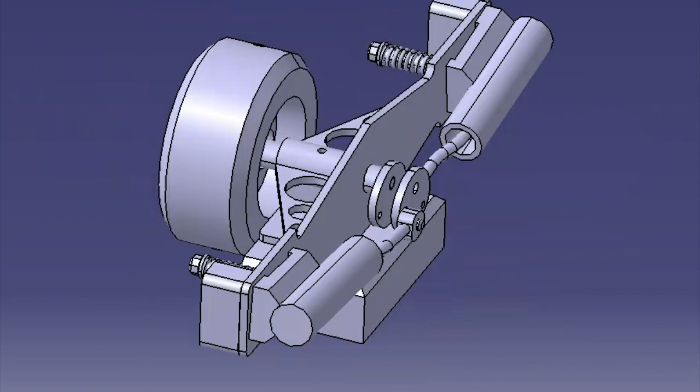In this video, we will be talking about the twin oscillating engine. Here you can see the twin oscillating engine in full assembly.

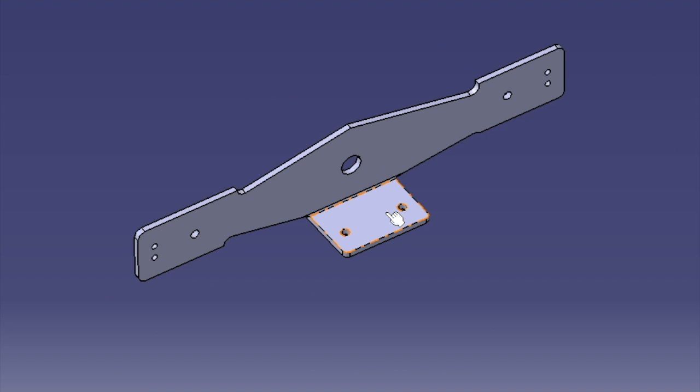Now we are going to move on to the base plate frame. The base plate frame is the mount for the piston assembly. It is made out of brass, and you can see that it's symmetrical about the y-axis.

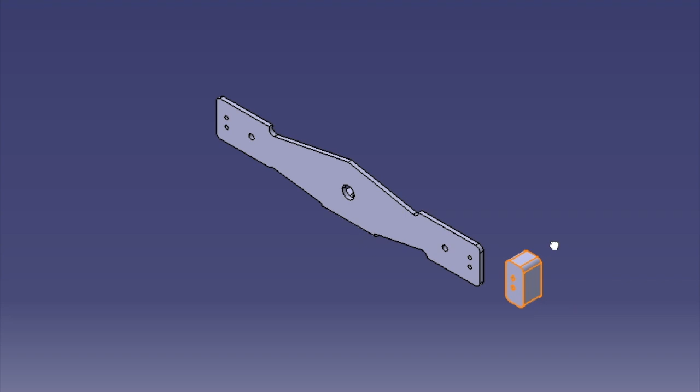Connected to the base plate are two top locks. The top locks act as stiffeners for the ends of the base plate. Here you can see there's one top lock on the right side, and one top lock on the left side. These are soldered to the base plate mount.

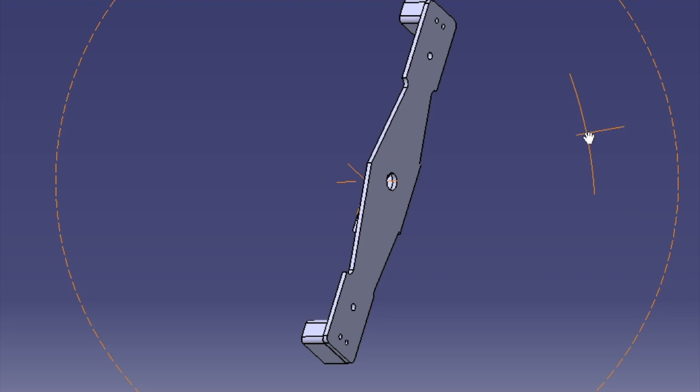Next, we are going to move on to the stiffener subassembly. Here you could see the crank bearing, which is the base of the stiffener assembly. The crank bearing is made out of brass. This is what holds the crankshaft. It is the guide of the crankshaft.

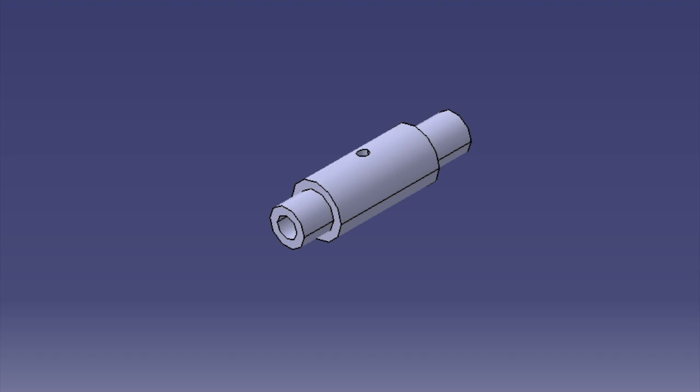Connected to the crank bearing are three stiffener plates. The two shown in the video are made out of brass, have a triangular form, and have holes in it to reduce the weight. These are used to mount the crank bearing to the plate frame assembly in order to hold the crankshaft in place. On the bottom is another stiffener plate used to level up the crank bearing and keep it secured.

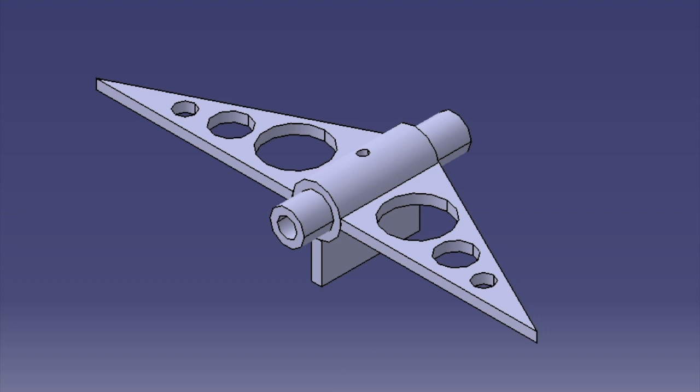Next, we will talk about the full assembly. Here is the base. The base is made out of wood and will hold up the rest of the assembly.

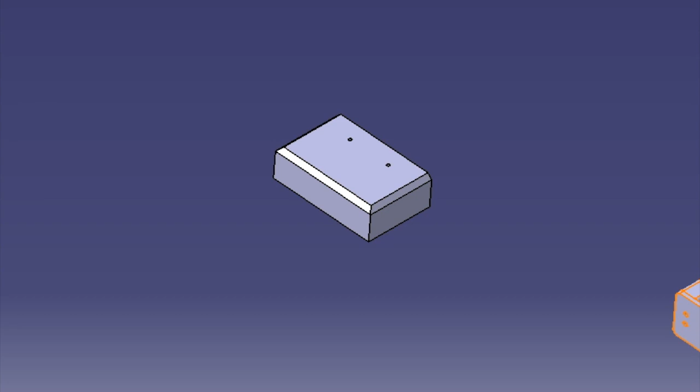Connected to the base is the base plate subassembly. It is connected by two wooden screws in these two holes.

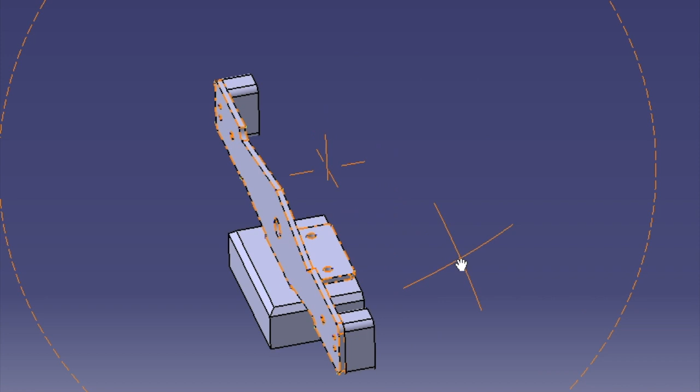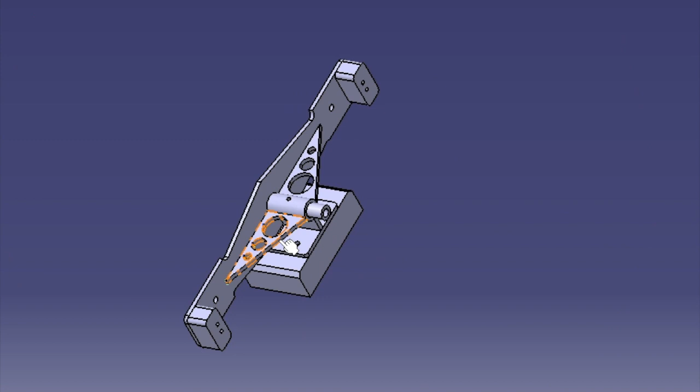Attached to the base plate is the stiffener assembly. It is soldered to the base plate at the three stiffeners.

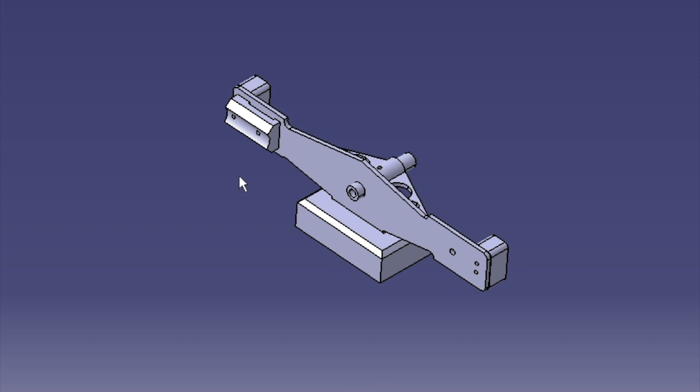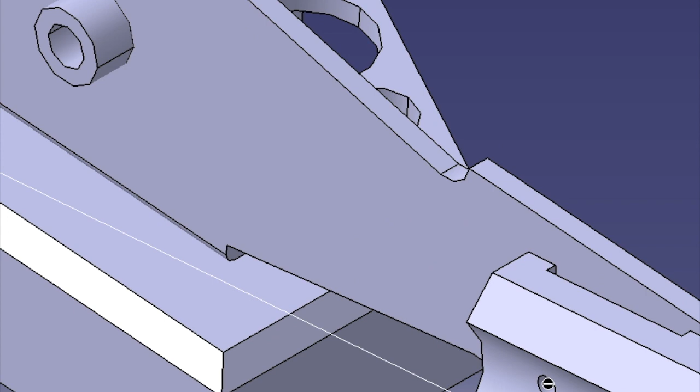Next, there are two cylinder bases. This is where the cylinder is going to sit. The cylinder bases are connected to the crank plate only at this hole. You see, it is free to rotate about that hole.

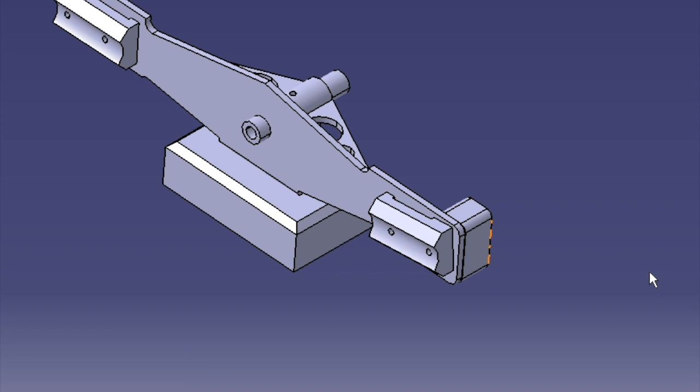The cylinder bases are made out of brass as well.

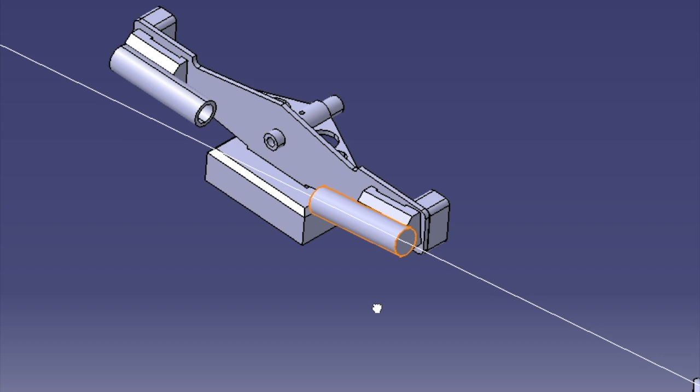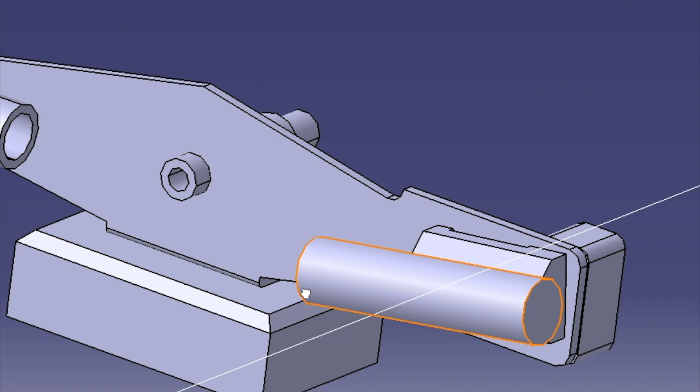Here you will see the cylinders that are connected to the bases. They are free to move about the same hole as the cylinder bases, as shown here. This will move with the bases around that hole. The cylinders are soldered to the cylinder bases.

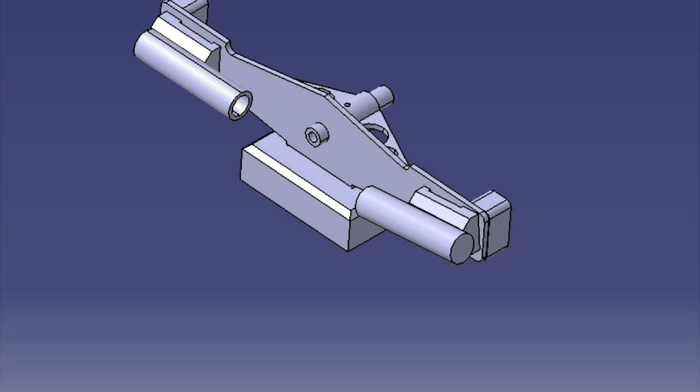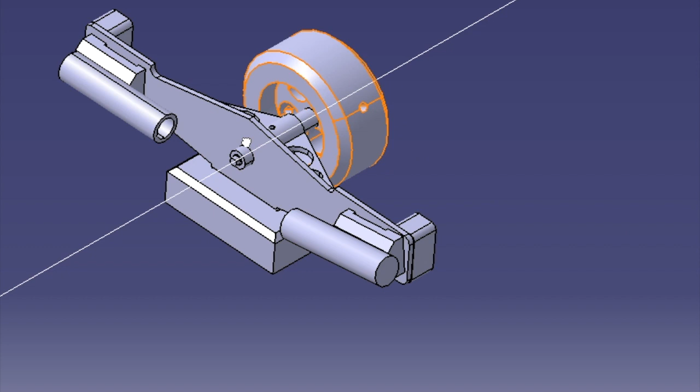Here is the crankshaft. This is what drives both the flywheel and the piston. It is free to rotate about the center axis. Here you will see the crank plate, which is connected to the crankshaft.

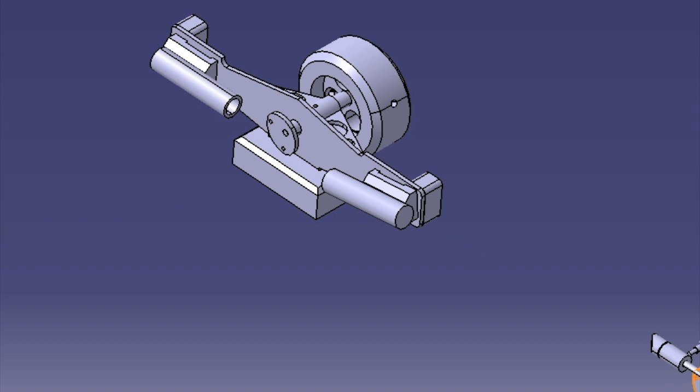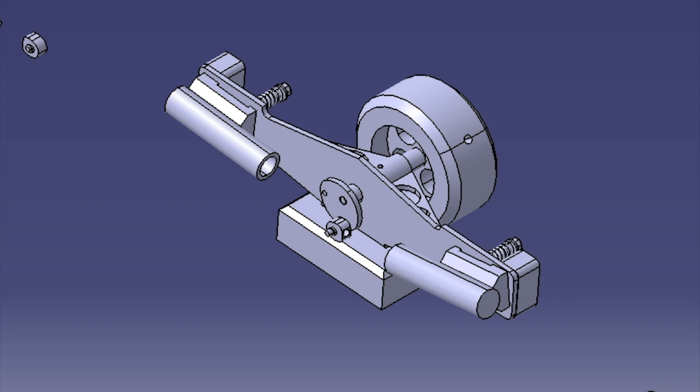Here is the big end of the piston stem and the pin that holds it in place. The pin is fitted into the big end and then fitted into the crank plate. On the other side of that pin is another crank plate, also fitted into the pin. Connected to the big end is the piston itself, the piston stem.

Connected to the piston stem is the piston that sits inside the cylinder. It is free to rotate in any way.

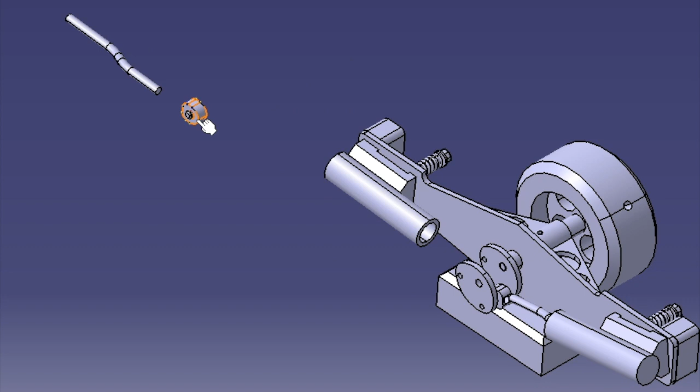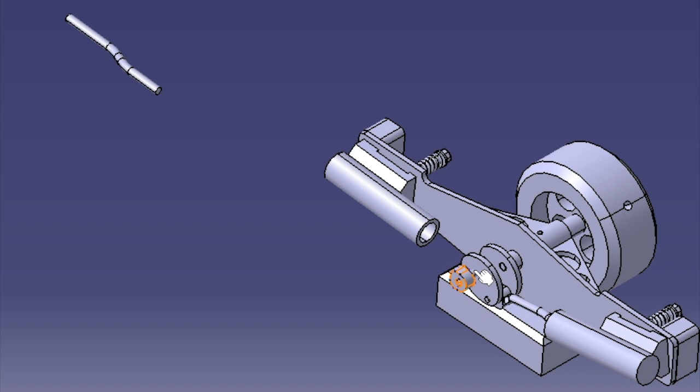On the other side, you have the same thing. You have the second big end for the second piston stem, which is connected to the second crank plate. The pin is fitted into the big end, which is fitted into the crank plate to keep it in place.

Connected to the big end is the second piston stem, and connected to the second piston stem is the second piston, which also sits inside the cylinder.

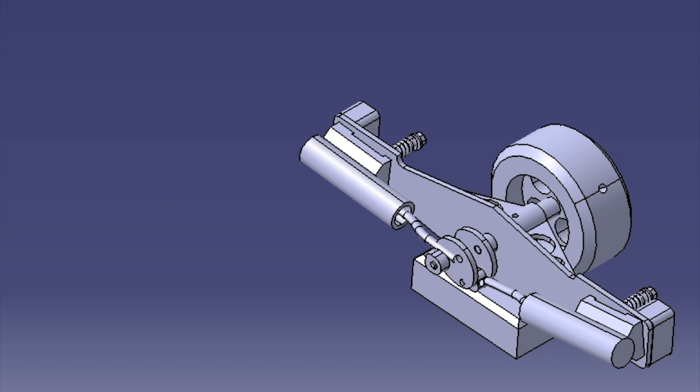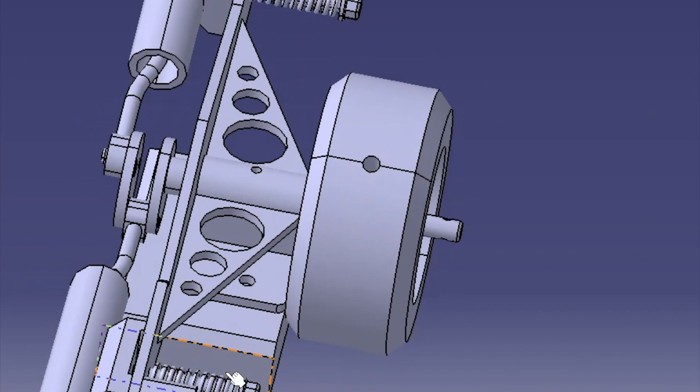Here you could see the cylinder pin spring, and the nut that holds the cylinder block, connecting it to the base plate. And there you have it. Here is the full assembly of the twin cylinder engine.

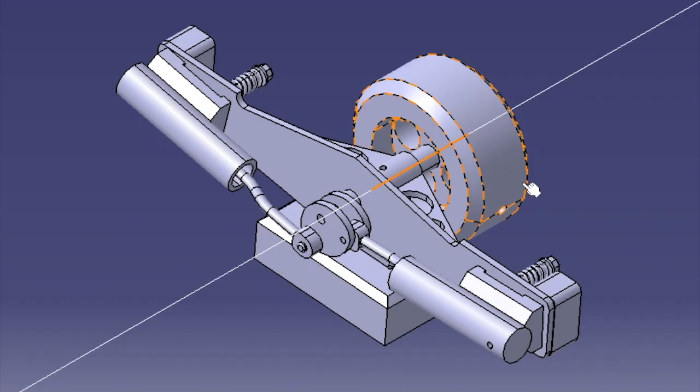Now let's look at the twin oscillating engine in action. As you can see, as the flywheel is rotated, the pistons move inside the cylinders, which move with the cylinder blocks around the pin.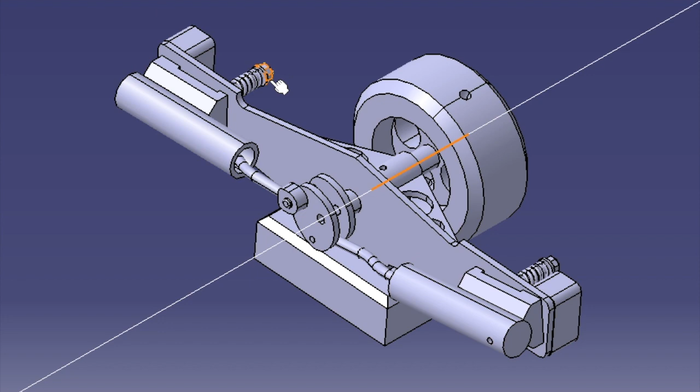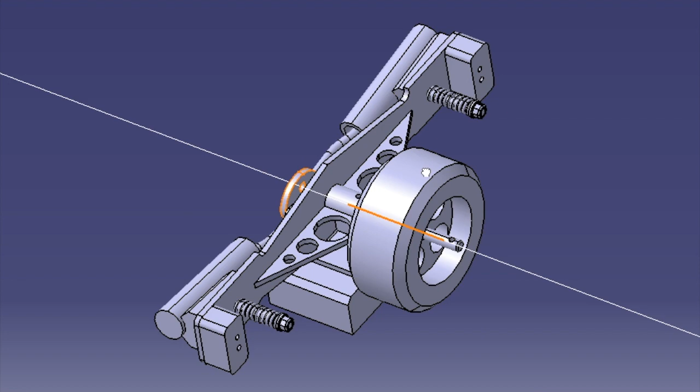The pins are here that hold them together. Here's the flywheel, and it is all free to rotate about the crankshaft. As the crankshaft rotates, the pistons rotate, the flywheel rotates, the cylinders rotate, and the pistons rotate inside the cylinder and move inside the cylinders.